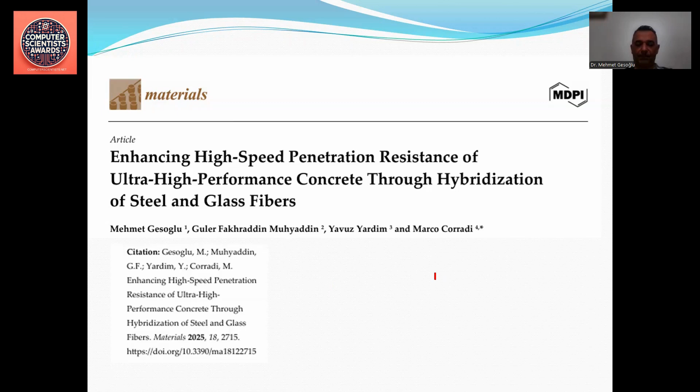Ultra-high performance concrete is very important and very popular nowadays. It has distinctive properties such as high compressive and flexural strength, but it is brittle. To overcome this drawback of brittleness, we need to add fibers to improve ductility and to make it more resistant to impact.

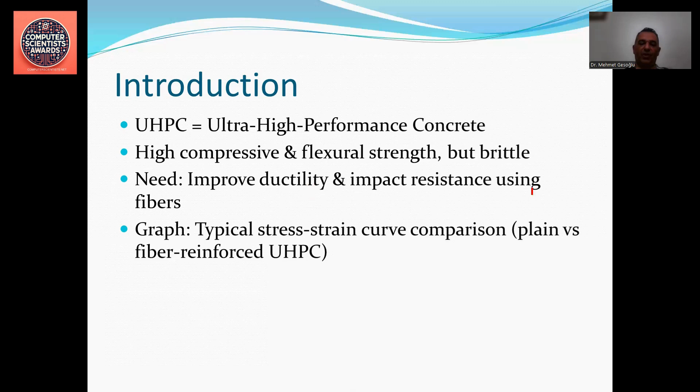The objective of this study is as follows: to assess the performance of hybrid fiber reinforced ultra-high-performance concrete under projectile impact, to compare mono and hybrid fiber types, and to use numerical simulation to validate test results.

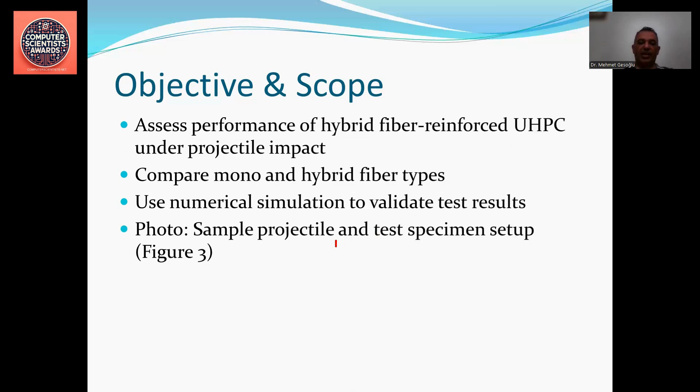In this study, a total of 22 concrete mixes were prepared. The reference concrete is called plain, and then single fiber and dual fiber types have been utilized to make the concrete mixes. The produced concretes were tested under compressive and flexural strength, and to determine fracture energy, they were tested under 3-point bending, and also exposed to projectile penetration tests to see the depth of penetration. Moreover, the test results have been simulated by means of the LS-DYNA program to validate the model.

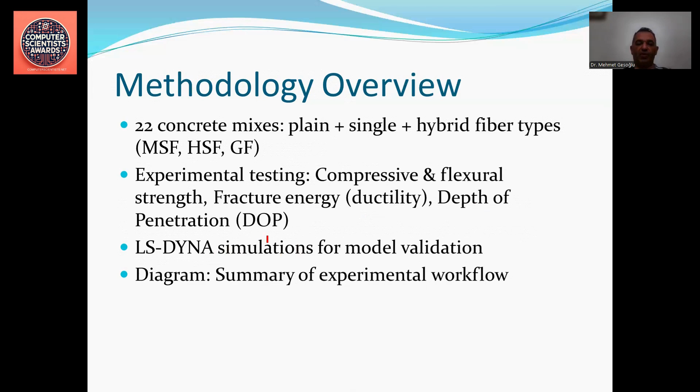The water binder ratio of the concretes is constant at 0.195. A total cement content and silica fume of 960 and 240 kilogram per cubic meter respectively have been utilized. The fiber volume was changing from 0.25% to 2%.

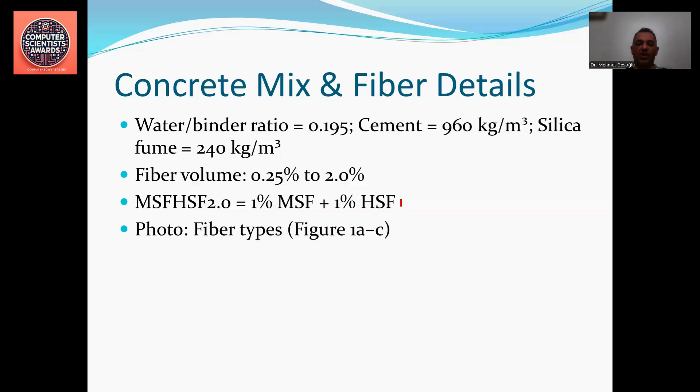For dual use of fibers, for example, the designation is as follows: MSF, HSF 2% means 1% microsteel fiber and 1% hook steel fibers are incorporated in this mixture.

This photo shows the types of fibers that were incorporated into the mixtures. Figure A shows micro steel fibers, this one shows hook steel fibers, and the last one shows the glass fibers.

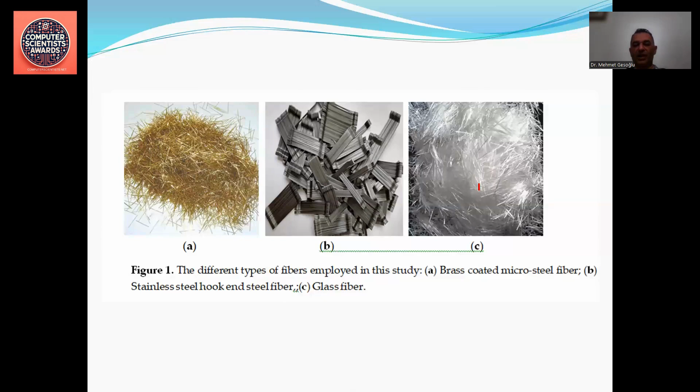The testing of the concrete mixtures in the hardened state was performed by means of an Instron machine with a capacity of 250 kilonewton, and the 3-point bending and fracture tests were conducted by means of closed loop operation.

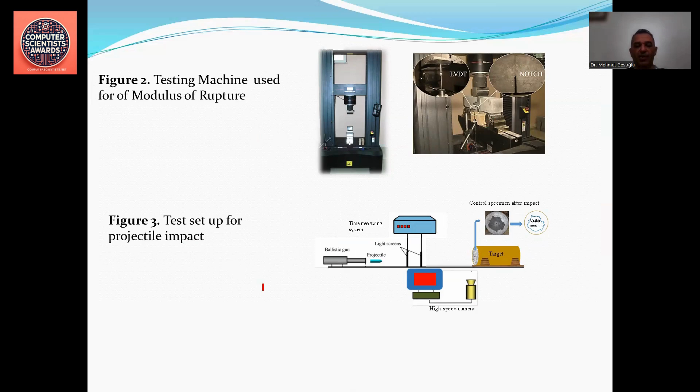This test setup shows the projectile penetration test, as you see.

The test results have shown that plain concrete reached a compressive strength of 137 megapascal. By using hybrid fiber of microsteel and hook steel fibers, the strength reached at most 169 megapascal. The order of the beneficial effect of fibers on impact strength is microsteel fiber, followed by glass fiber, and then hook steel fiber. This was also observed in compressive strength and flexural strength as well.

The overuse of superplasticizers in the case of hook steel fiber mixed concretes, and trapped air, were observed, which eventually lowered the compressive strength.

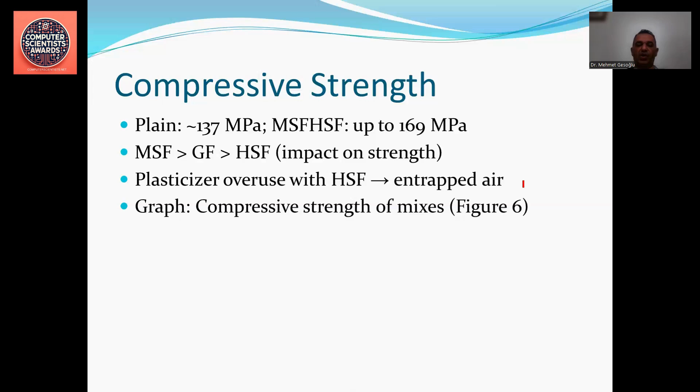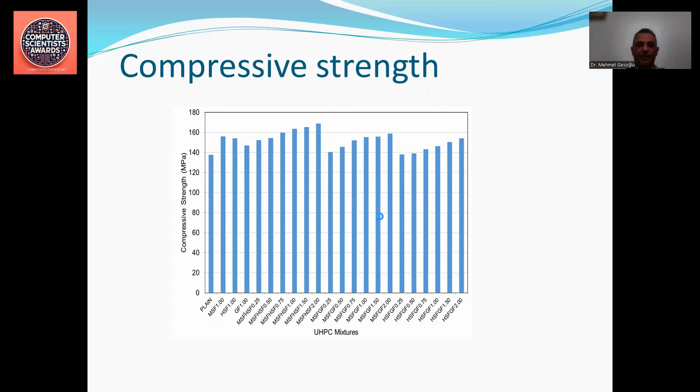The flexural strength, in other words modulus of rupture, was also tested. The plain concrete reached a value of almost 6 megapascal. By using hybrid fiber, this almost doubled to 13 megapascal, indicating almost 125% increment in the flexural strength.

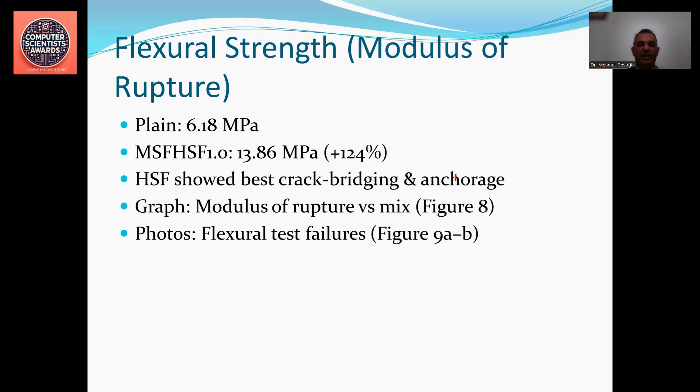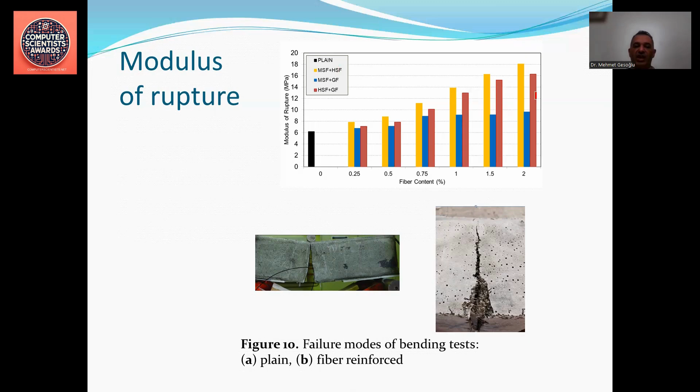Plain concrete has the lowest flexural strength, while the micro steel and hook steel fiber reached the highest strength at 2% fiber content.

Similarly, fracture energy and ductility were measured under 3-point bending. Plain concrete reached a value of 100 Newton per meter fracture energy, while at 1% micro steel fiber and hook steel fiber, the value of fracture energy reached 5,800 Newton per meter. So steel fibers increased post-cracking energy absorption ability.

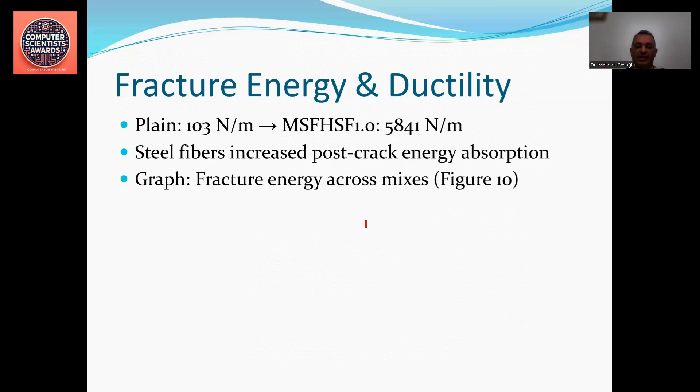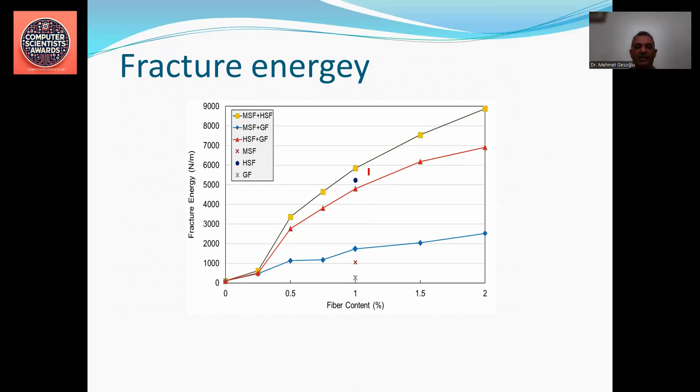Therefore the fracture energy of the concrete with hook steel fiber and micro steel fiber reached almost 9,000 Newton per meter fracture energy. The value of plain concrete in this case is lower, and hook steel fiber at 1% shows this. It is when the hook steel fiber is added to the mixture that fracture energy increases rapidly.

Also, penetration resistance test results have shown that plain concrete has a depth of penetration of only 24 centimeters, but by the addition of micro steel fiber and hook steel fiber together, this value decreased to 16.5 centimeters. That indicates up to a 32% reduction in the depth of penetration, showing the very favorable effect of micro steel fiber and hook steel fiber.

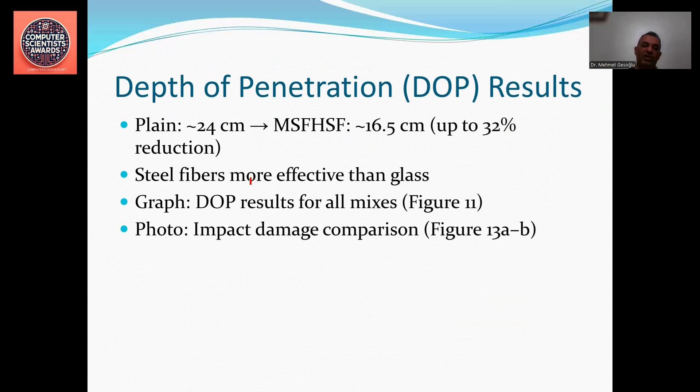So steel fibers seem to be more effective than glass fibers.

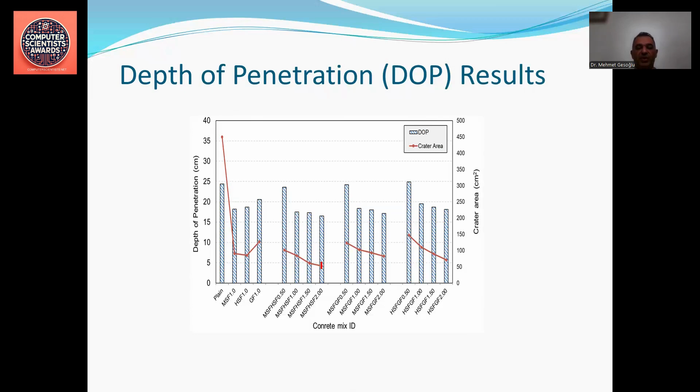The effect of steel fibers is more favorable in crater area, as you see.

Plain concrete has a crater area of 449 centimeters square. Again, by the use of steel fiber, micro steel and hook steel fibers together at 2%, this value decreased to 52 centimeters square. This indicates an 88% reduction in the crater area.

It seems that crater area is more sensitive to fracture toughness, as you see.

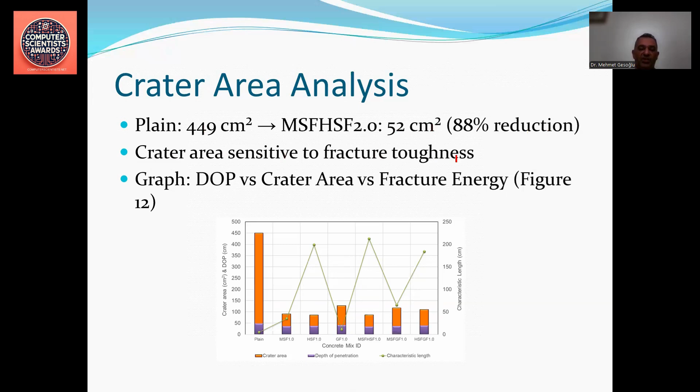Also, numerical simulation of the test results have been conducted by means of LS-DYNA modeling. This modeling was validated by the experiments. The error range between the numerical and experimental results ranges from 3 to 13%.

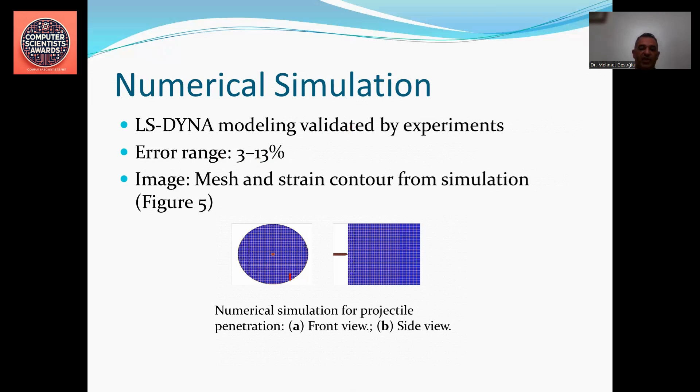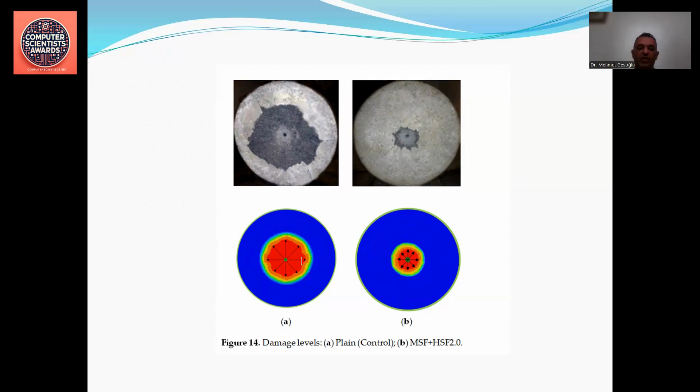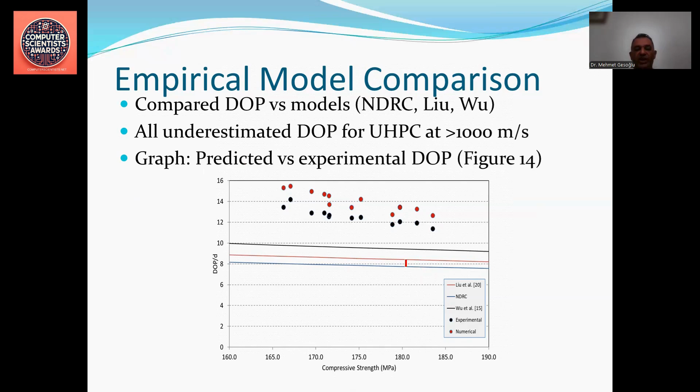The key conclusions of this paper are as follows: using a combination of fibers improved the strength values, which subsequently lowered the DOP values.

The use of both long and short steel fibers together demonstrated the most effective performance in reducing the damage caused by projectile impacts. Hybrid micro steel fiber and hook steel fiber has the highest strength, ductility, and resistance to penetration.

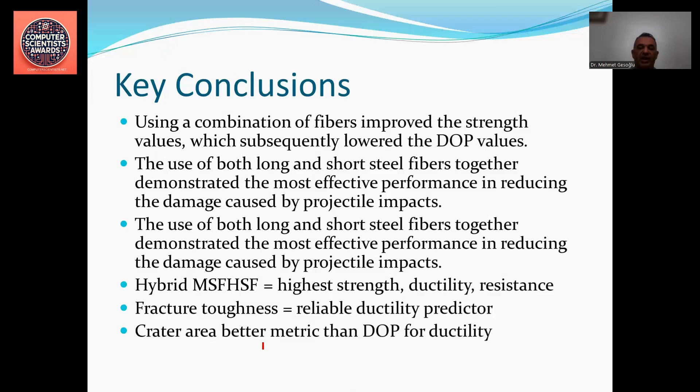Fracture toughness is a more reliable ductility predictor, and crater area is a better determination metric than depth of penetration for ductility. Thank you very much for your patience.